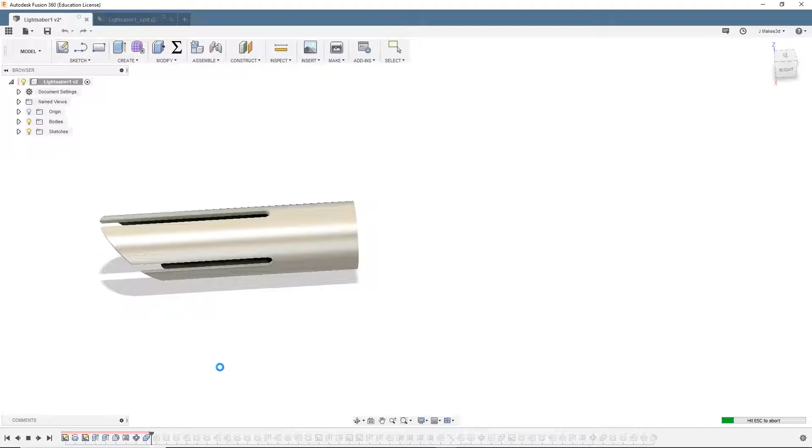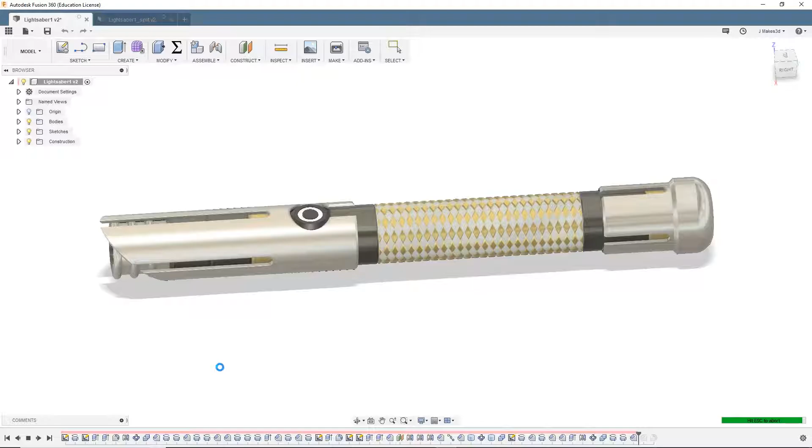One of the things I don't super like about this timeline playback is that while it shows the modeling steps, I spent a good part of my time in sketches figuring out how big everything was going to be, how everything was going to be set up. So by turning it into just the modeling features and completely ignoring the sketches, you lose some of the design process.

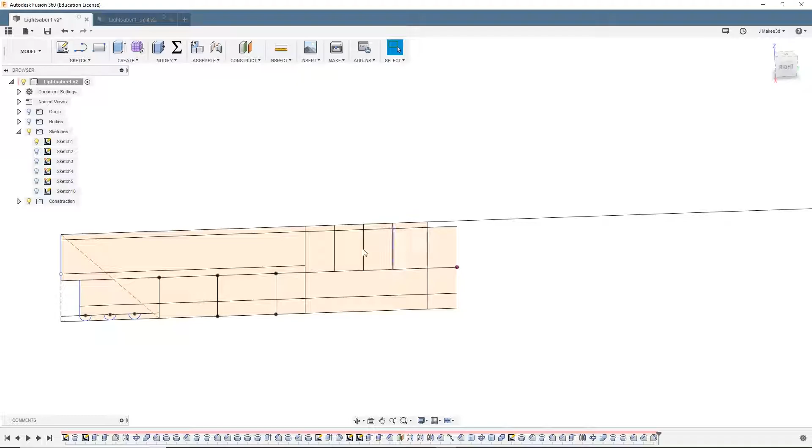So going back, we can completely turn off the body and start looking at sketches. In this one, you can see some ideas I had - I have an outer shell, the button, the different sections through here, and this end piece, all in one sketch. So I basically went down to here as my first thought process.

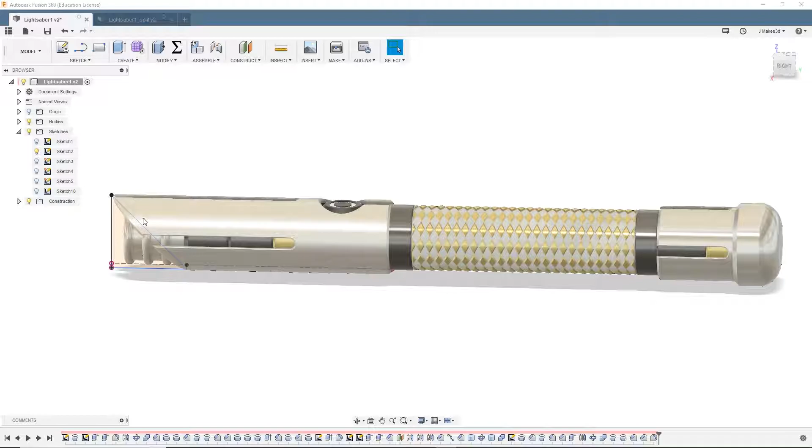Then in the next sketch, that's just to help cut this, because the original sketch wasn't set up to do that. Then we have the button sketch, which was to do this little indenting here. Then the sketch that had this piece.

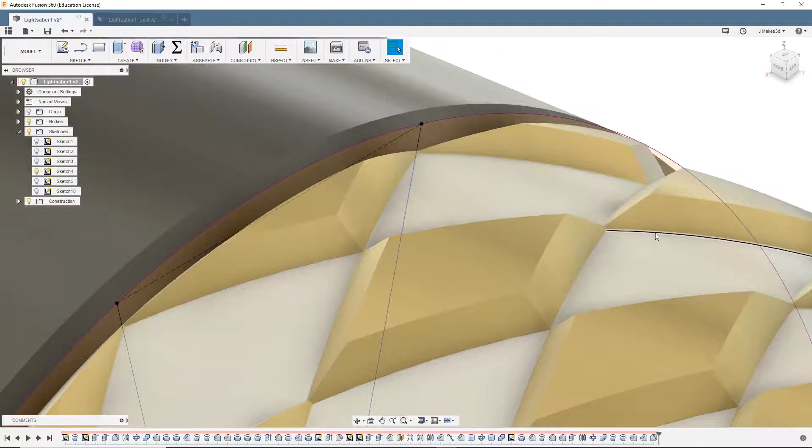So this was really interesting. I decided that I wanted it to pattern nicely, so you can see they meet just there. And in order to do that, what I needed was for it to be a certain angle - I believe this was 1/12 of 360 degrees, so a 30 degree split.

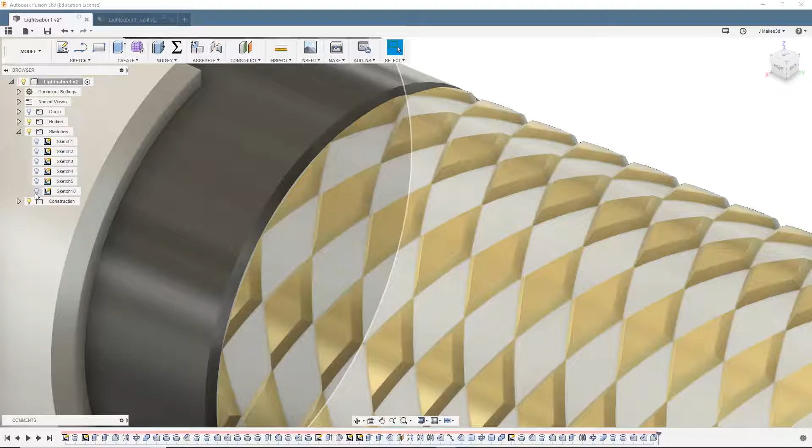And then I used that distance when I did this sketch, so that when these get extruded, they take up the correct amount of space. And then I have that one, and then I have this final sketch, which is for the ending area, where you can see the details of these pieces.

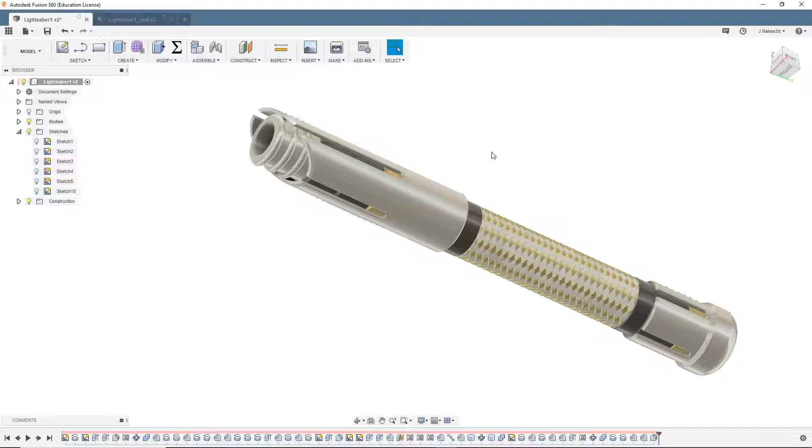So this is a lightsaber I put together, and actually if you hear a printer in the background, this lightsaber is currently printing. Some of the parts are done, some are still being printed, and I have the split version.

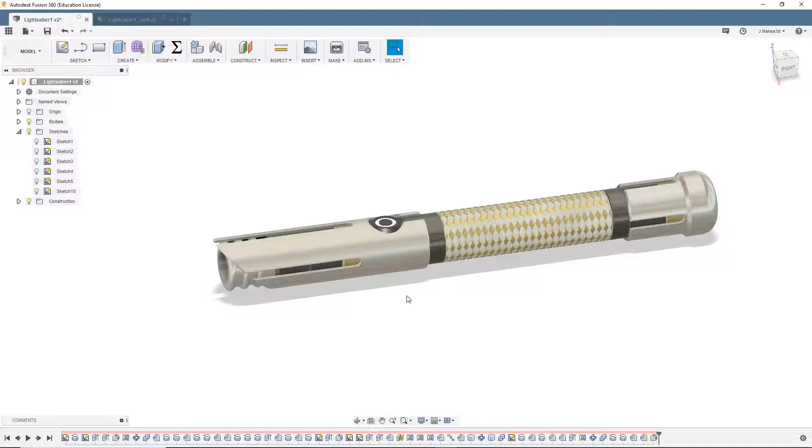So I've done a few lightsaber prints, and most of the time I'll do something like this, where I have the original lightsaber, and I'll keep the pristine copy if you will, and then make another copy, which is where I do my print preparation for it.

So in this case, this is what the print preparation for this looked like. You'll notice in this one that the end is cored out, but then you get that far in, and the rest of it is solid.

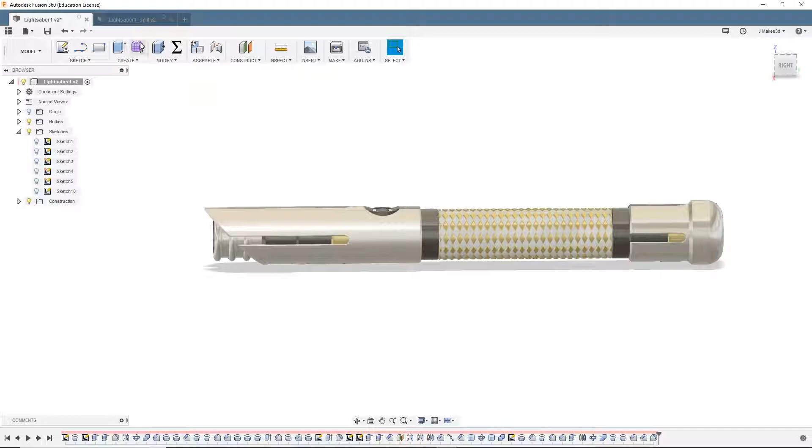So one of the things I had to do was decide how big I wanted my core piece to be, and do that throughout the entire thing. And then, for this piece, making sure it has the correct thickness, that it'll be fine.

You'll also notice that this doesn't have separate colors anymore - I decided it would be way too much to try and do these as separate pieces. And this is actually one of the pieces I've already printed, and it came out really nice without the two-color pattern going on.

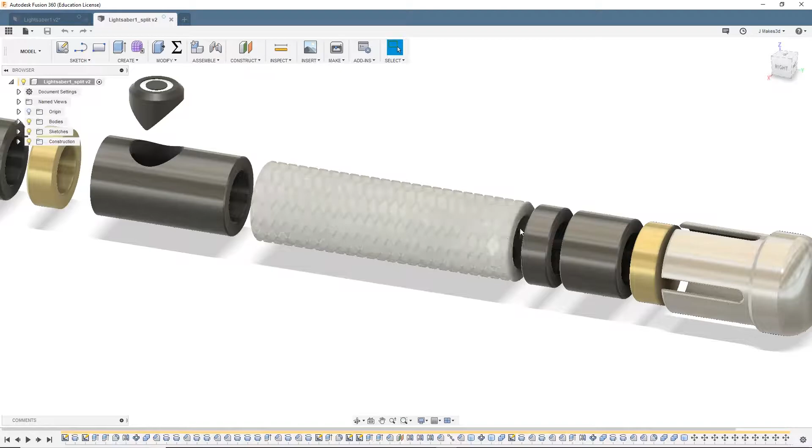So most of this, to get it ready for printing, was literally just coring out the lightsaber, combining this, and then separating everything to make sure it would assemble correctly.

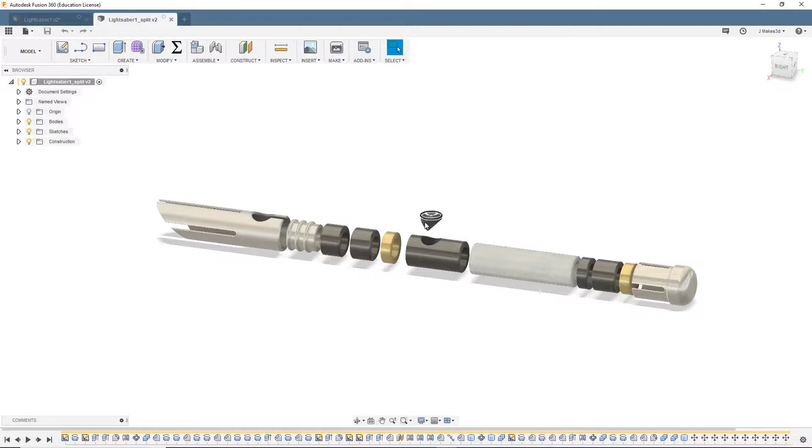And in this case, this piece actually goes on before the button goes in place, because the button goes up, as you can sort of see here. The button would block the path of the shroud, I guess.

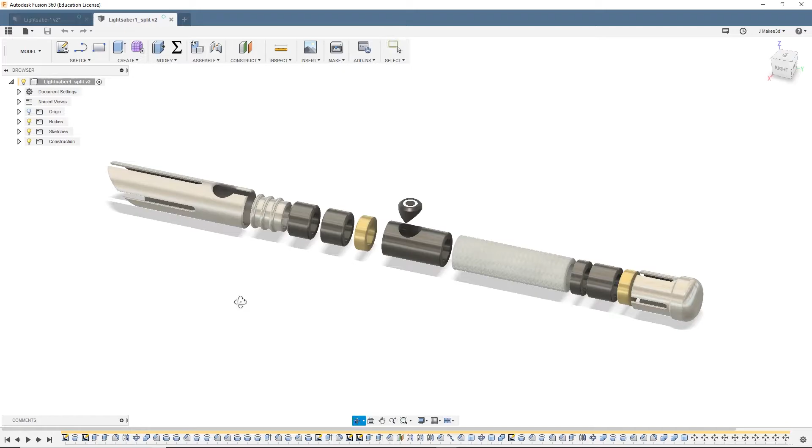So yeah, this is a lightsaber I put together, and this is just a little video about the design.